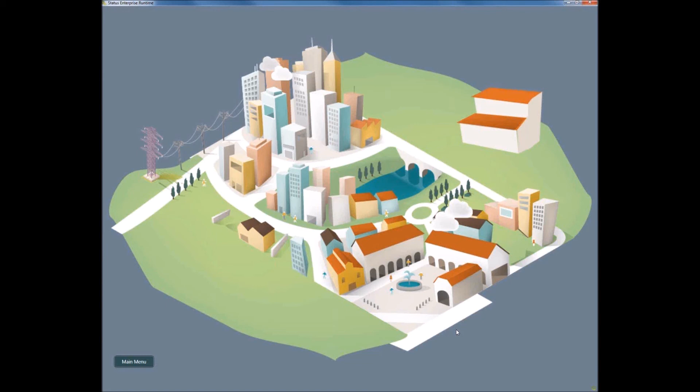See, at B-Scada, what we specialize in is collecting disparate information, organizing that information, and giving that back out to the end user on any device. So again, what that means is that Joe would now have a solution where he would be able to communicate and effectively see all the real-time information coming from these independent applications that used to not talk to each other, and be able to see this information on any device, including iPads, iPhones, Blackberries, and Androids.

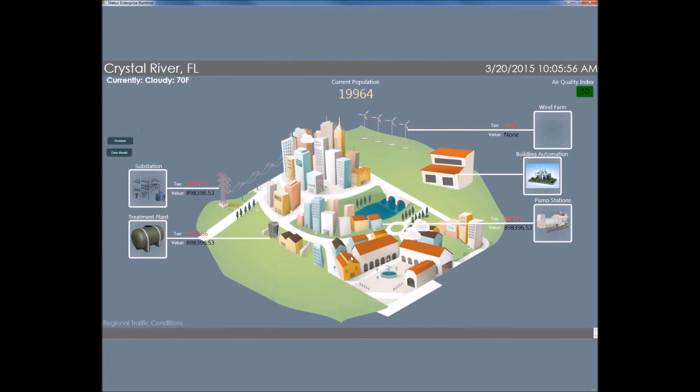So what we ended up with was originally a city that looked like this. There was no communication at all between the different applications. And we now have something where Joe can actually see what's going on and make changes based on the values he's seeing. Let's take a look at another situation. This time we're going to go into the substation here. And we can see that we're presented with the real-time information.

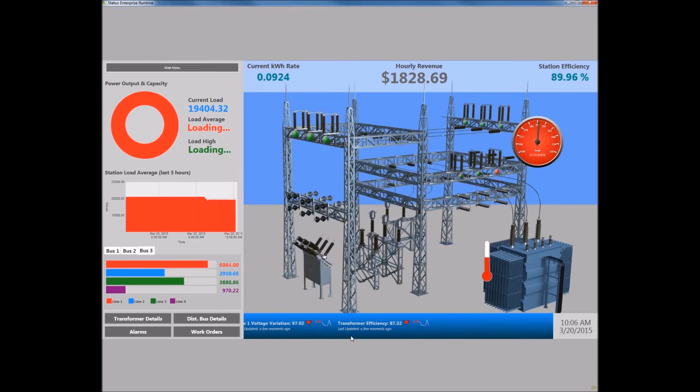But there were a couple problems that this particular application was seeing. They noticed a drop in electricity production on certain days and at certain times, but there was no equipment that was bad. So there were no reports of equipment failure. So we need to try to figure out how we are going to monitor this, and how we are going to address the problem that we're facing right now.

So at a glance, I could take a look and I could see some very basic information, some calculations that are being done. I've got hourly revenue being generated for me. I've got an overall station efficiency that's being generated for me. But let's go back to the problem at hand, and how do we solve this?

So what Joe decided to do was put an alarm and a notification using the B-Scada solution on a value. So if said value goes below a certain level, I want to trigger some alerts, I want to trigger some alarms, maybe generate some reports. All this is made possible through B-Scada.

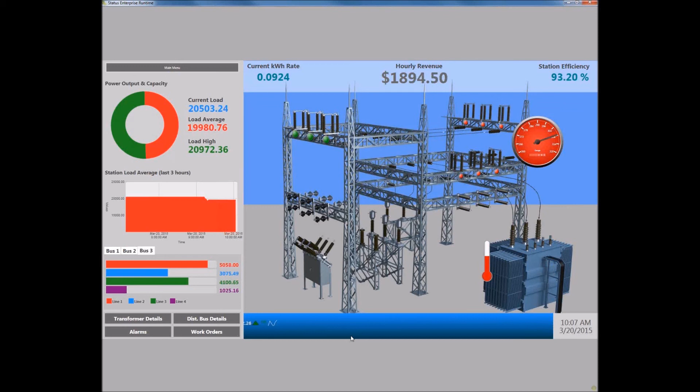Now traditionally, to have that kind of flexibility, you would need to go to other applications to do that. Or maybe it's 5 or 6 applications that you're running, and each one of those would have their own separate alerts and alarms. What we're proposing here is we could set up a trigger on a value, and if that value does something that we don't want it to do, we can send alarms, we can set values on other things inside of the system that we're monitoring, or generate reports. So let's take a look at how that's done.

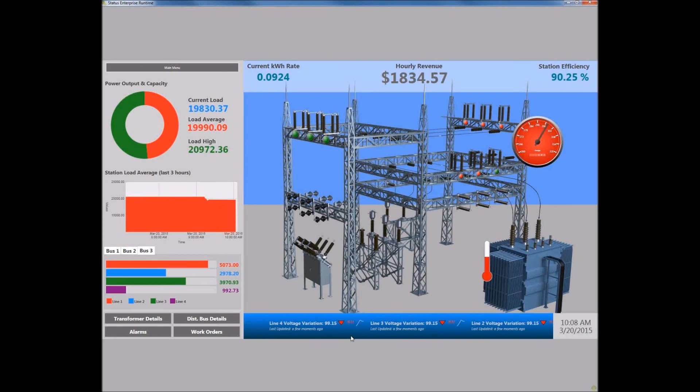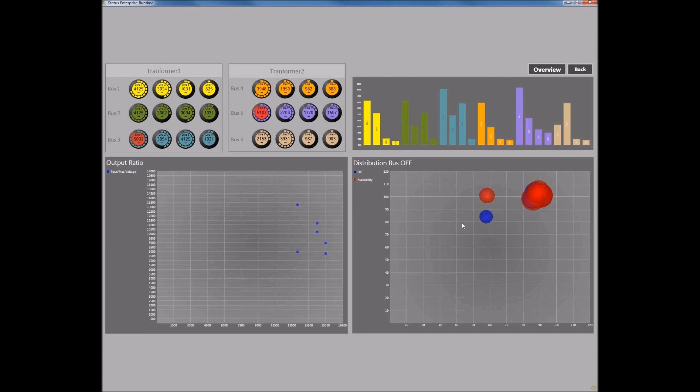I'm going to click on the distribution bus details page, which is showing me some real-time information. I've got some nice charts here I can look at. But I notice I have one little outlier here that's kind of not up to par with the others. So let me go ahead and click on this distribution bus and see what's going on.

Now, all the data that's being fed into the system currently is random. So I need to trigger these alarms and conditions myself. So to do that, I'm going to set this slider down to 0. And that's going to set up a chain of events that the software is going to do for me automatically to let the end user know that there's a problem.

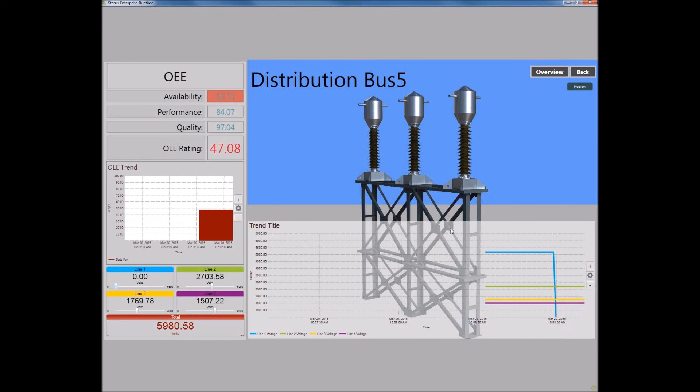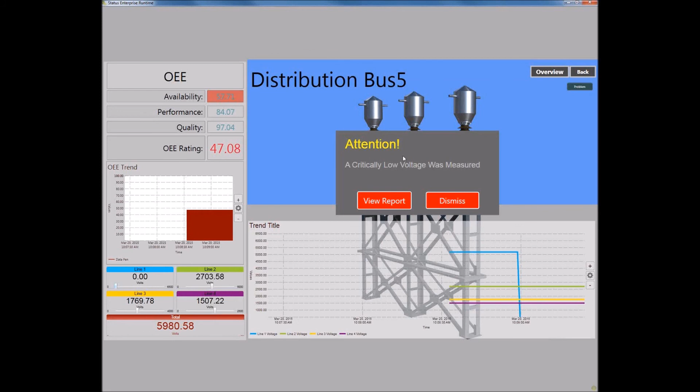So I'm going to set that down to 0. You'll see the data changing here into the trend. And what's going to happen is the system's going to notice that this has taken place, and it's going to fire an event that is going to allow this pop-up message to be viewed. What it's also going to do is it can send an email out to management, and it also is going to generate a report. So let me go ahead and take a look at that report.

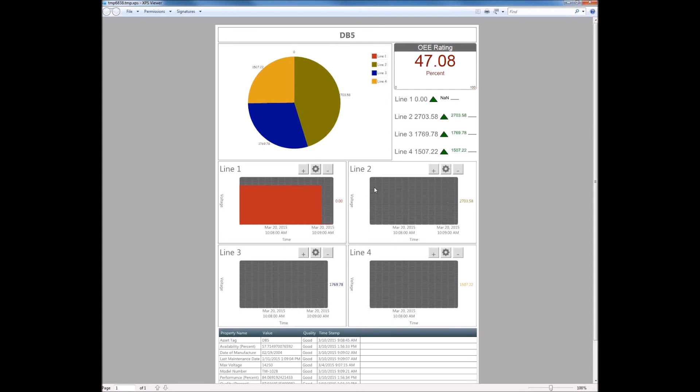So what this report is showing me is the last 2 minutes of data before that line went down. Again, these are things that you can configure yourself. So the report itself is all configurable, and you can tell what data you want to show. Now this could be very important for somebody to say if a line were to go down or production was stalled, I could take a look at the last 2 minutes or last 5 minutes, 10 minutes, 1 hour, and try to figure out and pinpoint where the problem was coming from.

Now you may be shocked to hear, but what the problem was actually coming from is that the workers were actually going out on their smoke breaks altogether. By doing that, they were shutting down some lines, which were then becoming idle, so the production was dropped back down. So let's go ahead and bump this production back up to a normal level.

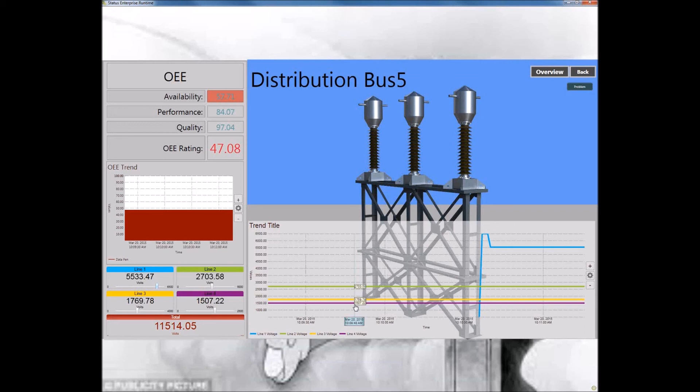Again, I think you can see this may not pertain to your industry, but the whole idea here is I can set up conditional triggers that are monitoring real-time values, and then based on those values, if they exceed some threshold or go down to some level, I can then trigger a set of events that the software will handle automatically, send emails, generate reports, turn things on and off, so that either it's brought to the end user's attention quickly, or the software goes ahead and handles the problem by itself.

While we're on this page, let's go ahead and take a look at some other things. So here I'm calculating the overall equipment effectiveness. That's another thing that you can do with the B-Scada solution, is you have the ability to write in custom calculations as well. So if you have custom algorithms, if you have custom calculations that are giving you efficiencies on equipment, all of that information can be created and again presented under one solution.

So before in the past you may have to have done these calculations in another application, maybe an ERP system, in order to see what was going on with the actual equipment. Well, now we're proposing that you can bring in this information into one platform and have all the data that you need turned into actionable information through the B-Scada solution.

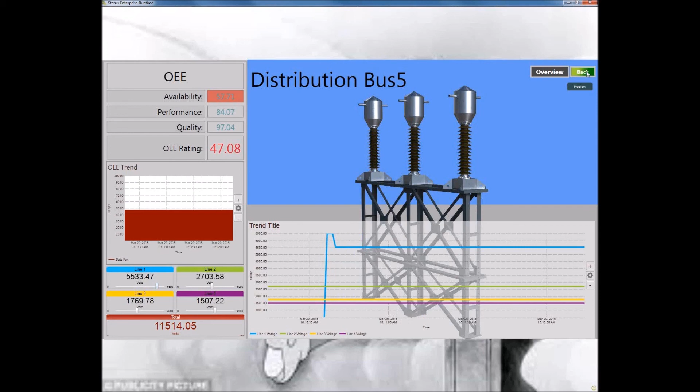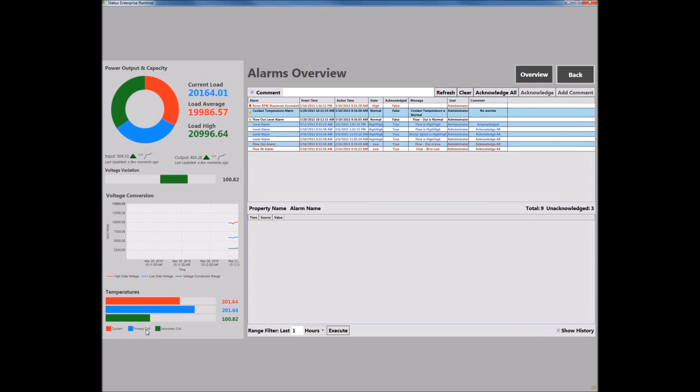Let's go ahead and go back to the main menu. I want to take a quick look at the alarms page and just let you know as well that this system can also be set up to display alarms as well. So you may think of this as a traditional SCADA system, but what I'd like to say is that we do much more than a traditional SCADA system.

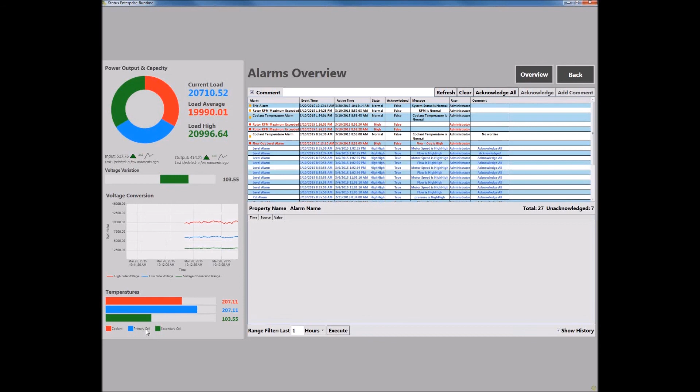Usually with a traditional system, you're paying for modules. You want alarming, you want historical data, you want workflow, you want asset management. All these different things are usually modules or totally separate applications that you have to purchase. With B-Scada, the solution is all-inclusive, meaning that we will include every module into the basic package. The other nice thing about that is as we add on modules to the system, you'll get them at no extra charge. So everything is included, and you'll never have to buy anything more with a B-Scada solution.

Let's go back to the main menu, and I want to show you one other application. But before I do that, let's think about what maybe a pump station manager or a maintenance manager would go through on a day-to-day basis. So usually you would have a pump station manager, and he's in charge of a select number of stations that he needs to monitor. In most cases, those stations are not feeding data back to any central hub.

So he has to take a route and go manually check on each pump station. That's if the office hasn't called him and let him know of a problem. So the engineer gets in his truck, starts his truck, maybe goes to the gas station, fills it up, and starts his day.

Well, let's say that the office then calls him and he has a problem. So he needs to go immediately to that pump station to find out what the issue is. Because there's no real information that's sent to him, he needs to investigate every part of that pump station to figure out what was going on. Now, of course, he may have some common things that he knows to look at. But again, he has to do everything manually.

So he goes to that pump station, and he eventually figures out that it was a burnt pump drive. Well, now what the engineer needs to do is, if he doesn't have that part in his truck, he has to go to a warehouse to get that part. So there's another drive to the warehouse. Well, let's say he arrives at the warehouse and realizes that he doesn't have that part in stock. Now he's in big trouble.

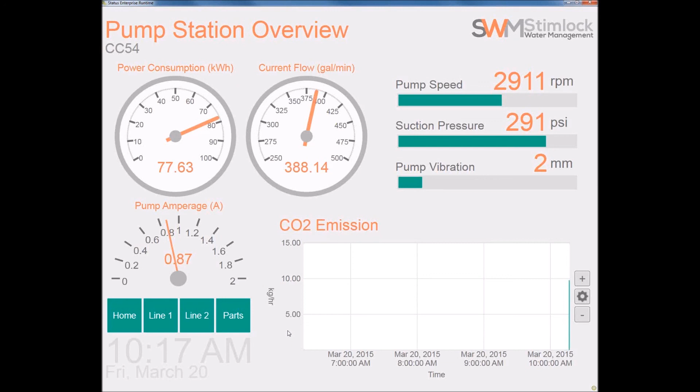But here's the kicker. Because B-Scada specializes in collecting information from non-traditional locations, it could be coming from a database, an ERP system, a PLC, an OPC server, or a hardware sensor. Because we're collecting this information from all these different sources, we have a better understanding of what the whole overall system is doing. So in that example I gave where we had a problem at this pump station and needed to fix a pump drive, I can immediately go into my parts page and see all my current inventory.

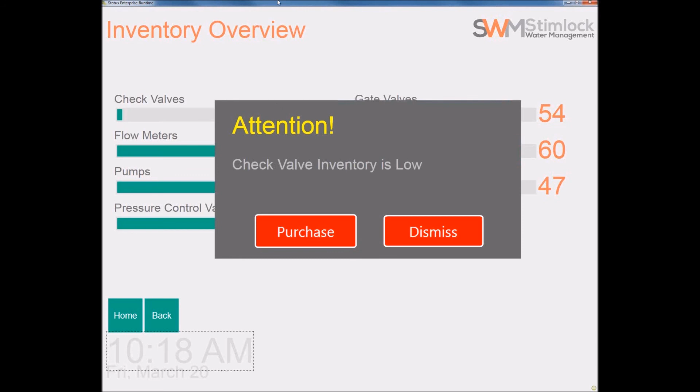Now let's go back to the example. Remember we had said that the current inventory was out, so the maintenance manager had to then go find this part. Well, that too could have been prevented with the B-Scada solution. So for example, if this part drops below a certain level, I want to fire an event. So I drop the inventory level down to 2. Immediately I'm seen with an event that says the inventory level is low. I can choose to dismiss this message and maybe order later, or I can say, you know what, I'm going to go ahead and purchase this.

And what's going to happen is it's going to create a purchase order for me that I can then print off, send to somebody, and get that part ordered so I don't run into this situation where I need that part and I don't have it on hand. So again, we're taking the traditional approach of visualizing this information and we're expanding it to other things. Now I have an inventory control system that I can use in conjunction with my traditional SCADA system.

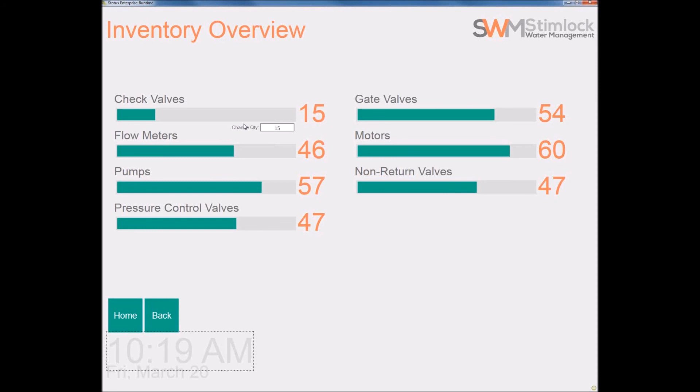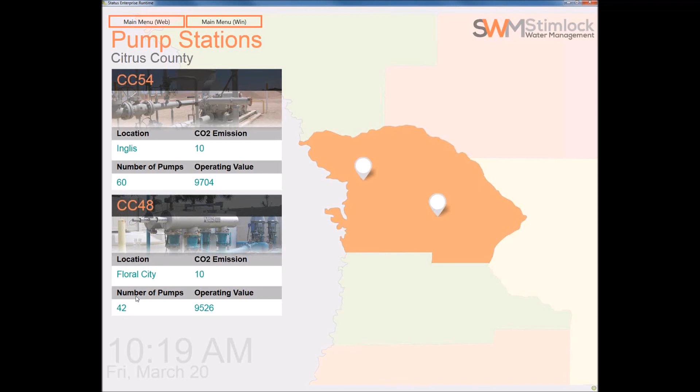Let's go ahead and bump this inventory level back up. The other thing too is everything is also bidirectional, meaning I can send values back to the original source. So you can see here I changed the quantity to 15. That's now updating my inventory to let the end users know that I have 15 of these parts in stock. The other thing I wanted to share is, wouldn't it be nice for this engineer to be able to do all of the things that I just went over from an iPad? Well, I'm here to tell you that you can.

So I'm going to open up a new window and log into our gateway. This is a web solution using pure HTML5, so it can be viewed on any device. Here's my maintenance engineer example - I pull up a browser in my truck, and I can see what's going on with those individual stations.

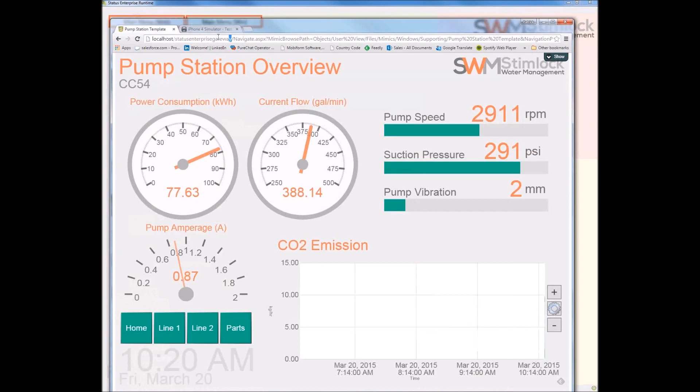Again, just to hit that point home, let's go into my iPhone simulator, get my gateway address, and I've got the same information now on my iPhone.

Pretty amazing. And the nice thing about this is there's no extra work at all for the end user to do. So I think that gives you some pretty good ideas of what the B-Scada solution could provide, some of the problems that we're helping address for these end users. Let's go ahead and talk about how this system was made.

Behind the system is a concept we take advantage of called data modeling, or information modeling. If you're not familiar with that solution or concept, let's take a look at what that means.

Everybody has a cell phone. If you were to look at that cell phone and look at your contact list, that's a virtual representation of all the people that you know or care to know that are stored in your phone. That essentially is a data model.

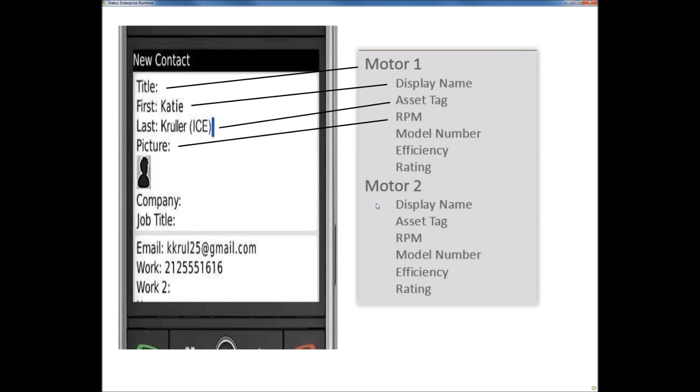So if we think of it more in terms of sensors or different equipment, instead of having a new contact, you would have something like a new motor or a new temperature sensor. Those things would have attached properties that you care about, such as first name or last name - but in our world, those would be like temperature value, asset name, or when it was last maintained. You can see a data model, or information model, simply resembles your contact list in your cell phone, and that's a great way of thinking of it.

To build that model, you open up an application called the Data Model Designer. The very first thing you're going to do is create some types. A type is a very generic something that exists in the thing you want to monitor. In the examples we were showing, we're going to start out with creating an equipment type. So I would say 'add new root type' and give it a name - in this case, I named it equipment.

You then attach properties to those types. So for example, on any piece of equipment, I want to be concerned with asset tag, when it was manufactured, what the model number is, and are there any work orders assigned to it - very basic properties I'd like to be viewable on any piece of equipment I'm monitoring.

The next thing I can do is create what's called a subtype. If you think of it as a parent-child relationship, a subtype will inherit any properties found on its parent. So all these subtypes in my list will have every property found on equipment, as well as their own specific properties. If we take a look at motor, we can see I've got motor speed.

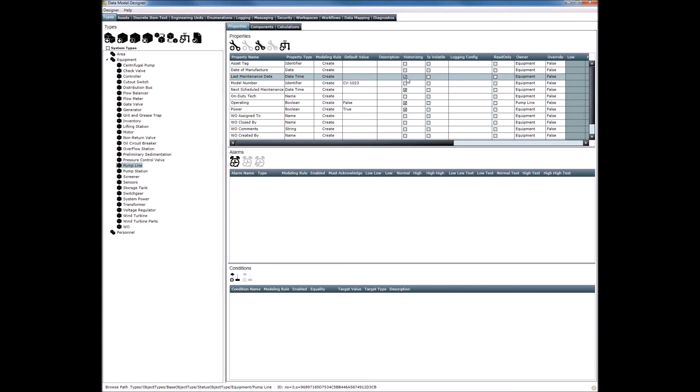Once you have a basic type structure defined, the next thing you're going to do is create your assets. What an asset is, if you refer back to the cell phone example, when you create a new contact, you're essentially creating a new asset. That's what we're doing here. I'm going to click on Asset and say I want to create a new asset.

So in the demo that we saw, I have a town with different components of that town. Let's go to the pump station. I have different views with all of my pump stations, and all the pump stations have all the corresponding lines with all the pieces of equipment. The nice thing is, if you remember we created that alarm on that motor, every time I create a new motor, it's going to create that alarm for me. Very nice, easy system to use, and it allows you to really scale up your application.

Let's go ahead and create a new pump station to see how that's done. I'm going to create a new asset, but first I'm going to create a collection that's going to hold those assets, and I'll just call this My Pump Stations.

I have my pump stations created. Now what I want to do is actually create a new asset. So I'll say Create Asset, pick the type I want, say Create a new pump station, give it a name, hit OK, and the software is going to create that pump station for me. It's also going to create all the alarms, all the historical configurations, all my conditional triggers, and all my equipment associated with the pump station.

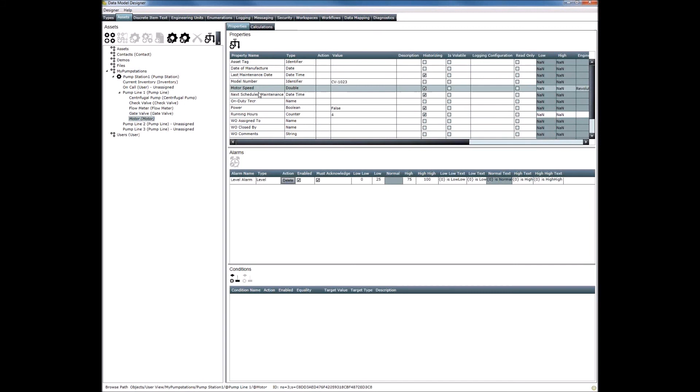Now you could be asking yourself, okay, I've created this model with these real-world things, now how do I get the data to my model? Well, it's a very good question, and the next step is to click on Data Mappings. I have a configuration open right now that I'll edit, but what you would need to do is say File, New, and create a new configuration. Then you select where the data is coming from. We have a bunch of sources you can choose from — it could be OPC, a PLC, a database, or different hardware sensors. Wherever the data is coming from, you would select that type here.

Now, if you don't see your data type here, let's say you have a custom proprietary protocol or different hardware sensors you need to talk to, there's no worry. B-Scada can write a data connector that will talk to the type of data you need. So we're a very flexible and open solution that allows for you or B-Scada to create that connection to the data. Once you've picked your type, I'm going to go ahead and hit Connect.

Then I'm going to say Configure Mappings. This is where you would go and configure your mappings — essentially taking where the data is coming from and plugging it into your model. So here's my pump station example. If I were to say Pump Station 1, select maybe energy cost, and go ahead and tie that down to where the data could be coming from.

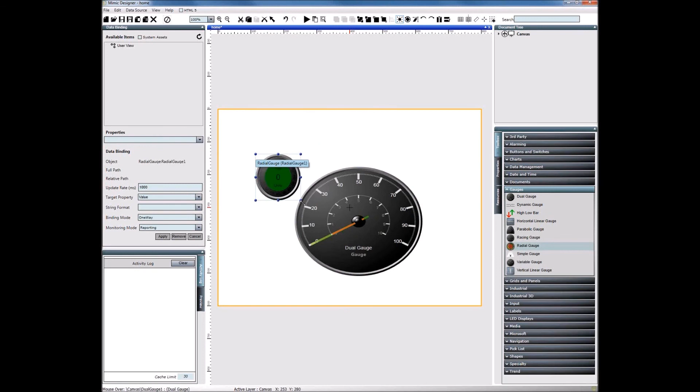Let's go ahead and just make something here quickly. You may know what I'm making right now. We are located in Florida, so I do have a soft spot in my heart for Walt Disney World. So we have a gauge here that's going to be displaying some information.

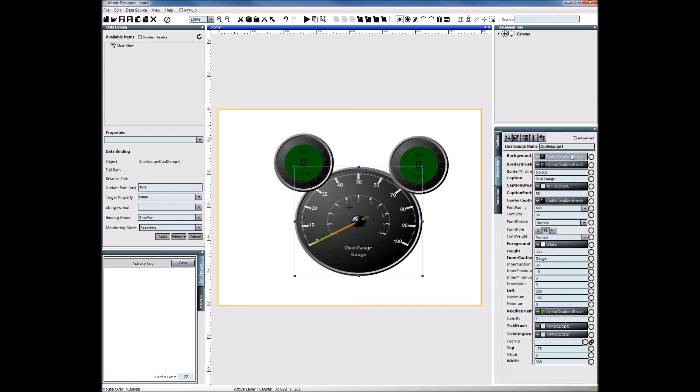Now with these gauges, you can also click on Properties and define how you want these gauges to look. So they're completely customizable.

But once you have your controls on the screen that you want to start showing data for, to connect those controls to show data, you go into the data binding panel. And because we're using a Mimic, we get to browse the whole model.

So if I go into, say, Assets, Town, I can see every single asset I have created. Now to bind that to the new pump station we created, all I have to do is say pump station, CO2 emission, value, hit apply. This control is now listening to this property on this individual asset.

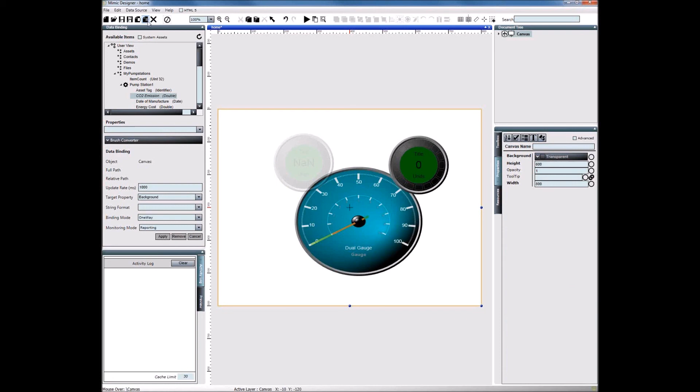That's a Mimic. I'm going to go ahead and close this and not save anything. The next thing I want to do is create a Mimic template. Now to do that, I'm going to open an existing template that I have. In this case, I'm going to use the pump station template.

So what this graphic will do is it's going to represent every single pump station I have in my facility. Another example would be if you had 50 motors that you wanted to display. In a traditional system, you would have to create 50 different screens. Well, what we're doing here in our B-Scada solution is allowing you to create a template that represents a motor type, or in this case, a pump station type.

So what that means is I create one graphic, and that graphic is going to represent all the pump stations or all the motors that I have in my facility. Again, saving you precious development time, as well as keeping your maintenance down, because if something were to change here, I only have to change it in one spot.

So let's see how these controls are bound. I'm going to go ahead and click on a gauge, and you can see that my data binding tree looks a little different. I now have a relative type tree option. So instead of binding directly to an asset, I'm binding to the type. And if I expand type, because I'm creating a pump station template, the type that I'm going to see is in fact a pump station.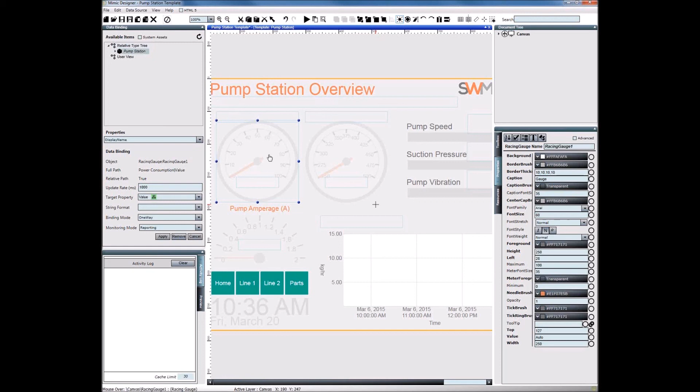So this gauge here, if I expand this out a little bit, you can see that it's just bound to the power consumption value. There's no direct asset attached to it. It's just going to the power consumption. Again, the beauty of this is it's going to save you development time and it's going to save you a lot of maintenance.

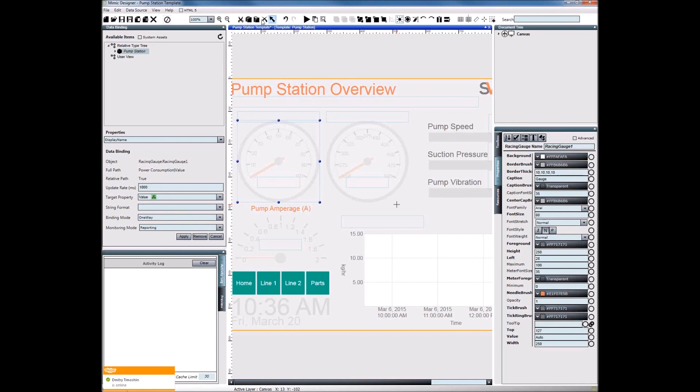Now you could be asking yourself, okay, well how does it know what asset I want to look at? Well, let's go ahead and open up that home screen so we can see how that's set up. So we're back to the home screen that we looked at previously. And I can see I have little icons here with some navigation buttons on it. The navigation buttons, which we have a bunch of, take you to different parts of the software, wherever you define that button to take you once you click it.

Now what we're doing here is if I go into properties and I say setup, this is where we're telling the software what asset we'd like to view and what document we want to open. So for example, in this one, the document that I'm opening is the pump station template, but the asset that I'd like to get the information from is this particular pump station. If I click on the other one, you can see that the document is exactly the same. The only thing that's changing is where the data is coming from. That's how you tell the software what asset you'd like to view from.

The other beauty about the Mimic Designer is that everything that is created here is going to be supported in the web, with a few exceptions. There are some charts and different controls that we have that aren't currently supported in HTML5, but will be. But in order to help you out, all you have to do is select that HTML5 checkbox, and you'll be limited to what controls are currently supported in HTML5. That way you can design and have no worries about something not being supported in the web browser.

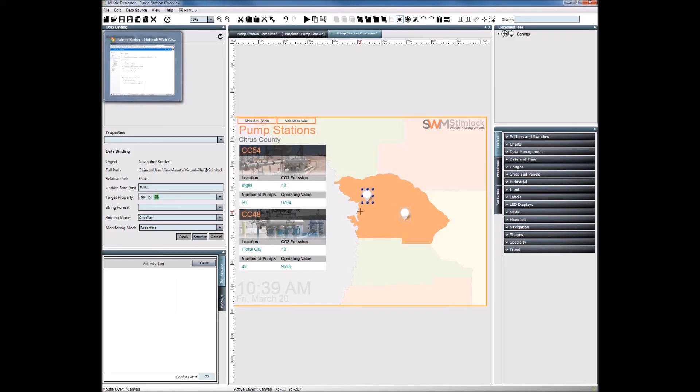Let's go ahead and talk about the web browser for a second. The only thing that you'll need to host a web solution in HTML5 is an IIS server. That's it. And we'll show you how easy that is to view that information. So again, all the end user would have to do is hit a website, since IIS is just a web hosted solution, browse for the page they want to view, and they can see their information.

There's a couple other things that we've done as well. For example, you could have automatic login to the web. You can have auto login to the Windows client as well. And the other thing that you can do is tie different mimics down to certain people. So maybe you have electrical engineers and you have a whole set of screens that you only want them to see. Well, you can configure that with the B-Scada solution.

I hope I demonstrated today some of the benefits that you'll receive from using a B-Scada solution.